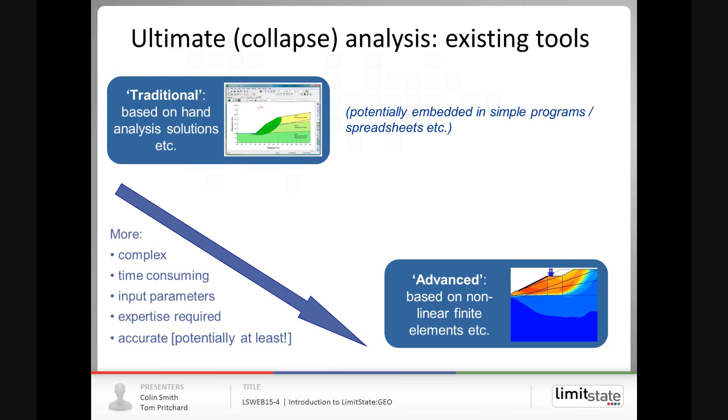Now, as I've said, Limit State focuses on tools for limit state or ultimate limit state analysis. To put this into context with other currently available software, on the one hand, on the top left of this diagram, we have generally easy to use software and spreadsheets that are based generally on conventional hand calculation type methods. And these can deal with specific problem types. On the other hand, down on the bottom right, we have more complex finite element software. These can model any problem geometry and complex soil behavior, but often can be quite difficult to use. Between these two, there's a gap, and this is where we feel limit, or computational limit analysis sits, or rigid plastic analysis.

This type of method provides the ease of use of traditional software. You only need a few parameters such as cohesion, friction, and unit weight, but it gives you the flexibility of dealing with any geometry that you get from finite elements. This is primarily what Limit State focuses on. Now, this sort of approach can deal with geotechnical problems. It can also deal with other engineering problems such as masonry arch bridge analysis and concrete slab analysis. All of these can be cast in a rigid plastic form and use computational limit analysis.

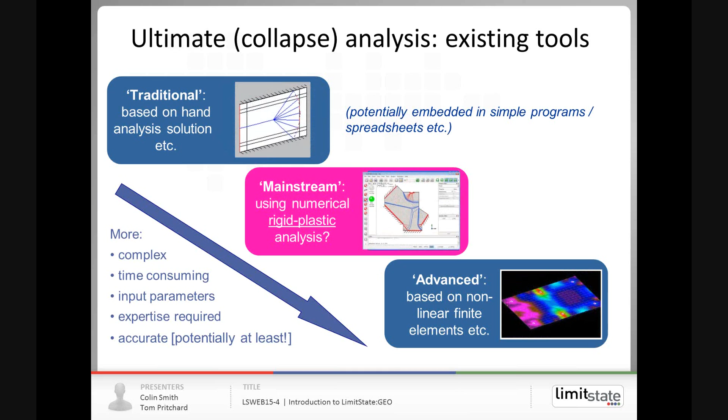In terms of the geotechnical analysis, this ability to find collapse loads can be applied to a whole range of problems. We can deal with any geometry, so as you can see from the slide here, we can model footings, retaining walls, slopes, combined problems, soil structure interaction problems, where we can find the collapse load and the collapse mechanism for any of these problem types.

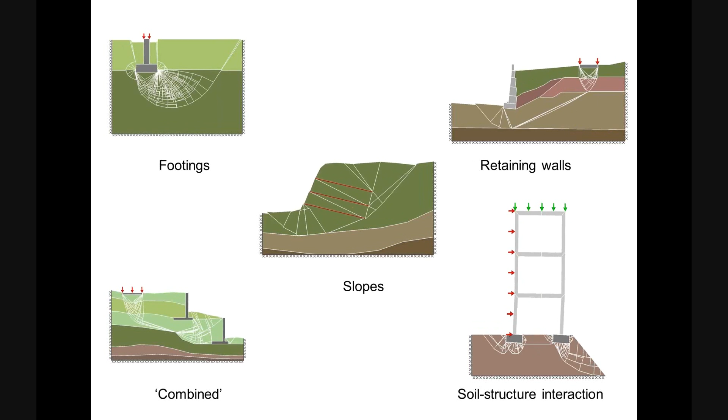And similar flexibility can be found in other LimitState products. At present, we have LimitState RING, LimitState GEO, which is the subject of today's webinar, and LimitState SLAB for concrete slab analysis.

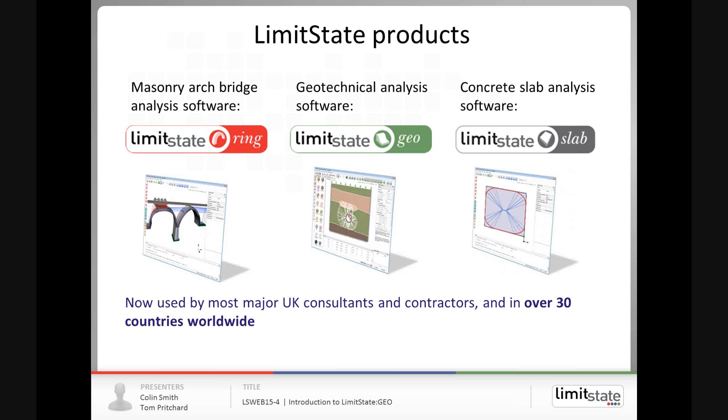If you've not used our software before, you may not be aware of how easy to use it is, and we feel this is one of the attractions, as well as its powerful ability to generate collapse modes for any geometry. And this has led to it being adopted by a wide range of companies across the world.

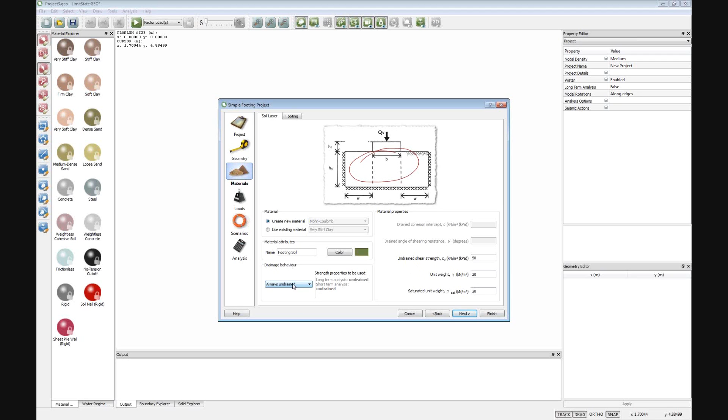This then brings up the wizard, and you can put in a number of properties. So here we can put a description of the problem, which we'll omit. Here we can generate the geometry, so the width of the footing, size of the soil body, and so on. We'll stick with the defaults here. Then we can define the material properties. Again, we'll stick with the defaults, but at the moment we're specifying an undrained shear strength of 50, a unit weight of 20, and we're declaring this material always behaves undrained.

We can then set the material properties for the footing. We're just going to make it a rigid, weightless material, and we can also specify the interface properties between the soil and the footing. So we're setting these values here, which basically say that on the interface we have half the friction and half the cohesion of the adjacent soil body.

We then specify a load. Default here is 1. I'm going to set that to 100. So it's 100 kilonewton per meter load. All the analysis is in plane strain, so this is per unit length. And we can then set up partial factors, which I'll skip for a moment. We'll come back to that later.

And some further information about the analysis type. We're going to use what's called factor loads, which is finding the margin of safety on the load applied to this footing, and nodal density, which governs the accuracy of the solution. We'll come back to that later again.

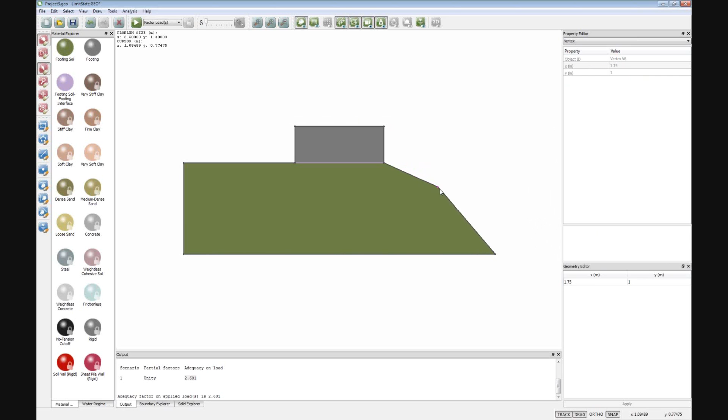So then if I click solve, the software will now find a new collapse mechanism, and it's very different from the previous one. Clearly it's going to slide down towards the slope, and we now have an adequacy factor of 1.882, which means that that foundation can only take a load 1.8 times bigger than we specified, rather than the 2.6 that we had before.

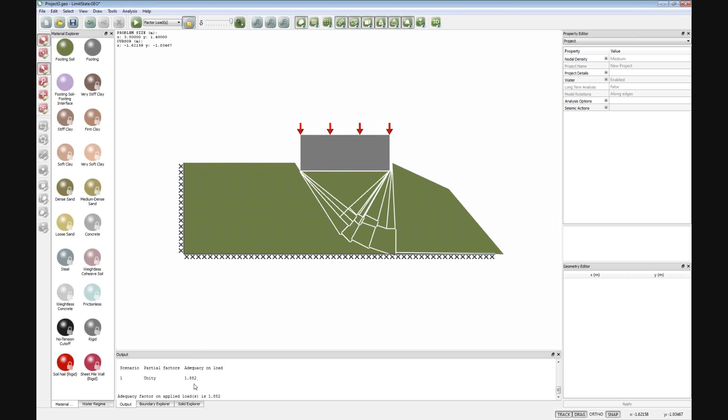I'll just undo that. So we have an undo button here, so I can just undo and revert that back there.

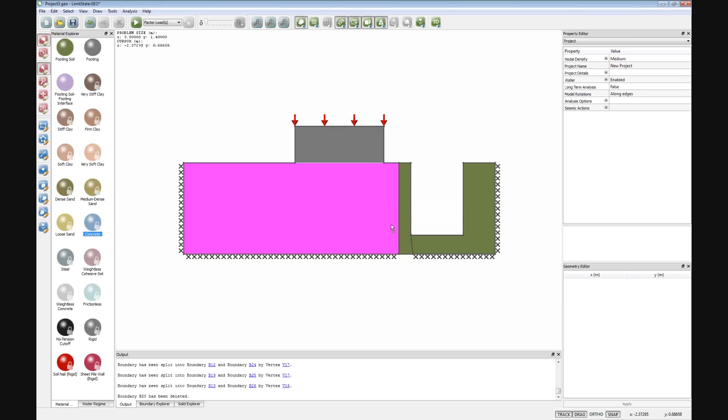But it's very easy to do what-if type calculations in this. So suppose you've got a trench there, and hypothetically we think, could we construct a wall next to it? It's not a very elegant wall there, so I'll make that out of concrete. So I have material properties over here on the left. These are standard things, so this concrete just basically has a very high shear strength and a unit weight.

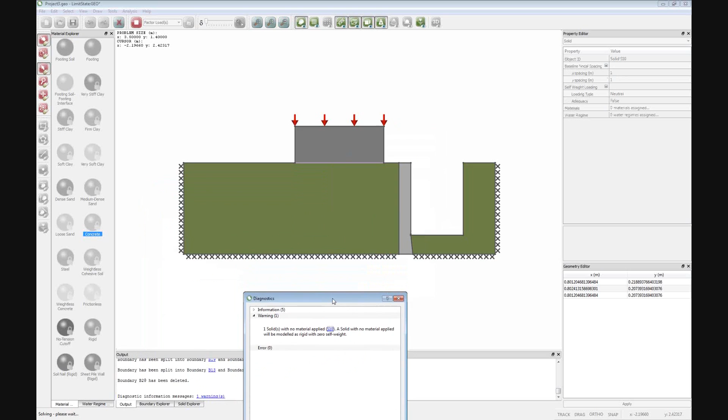I can drag and drop that, put that in place there, so I've now got a wall there, and we can see whether that, let me just see what's happened here. Right, I think I've just set the geometry slightly too far down, so we'll try that again. Let's put a smaller wall in place. Put the concrete there, and then run the analysis.

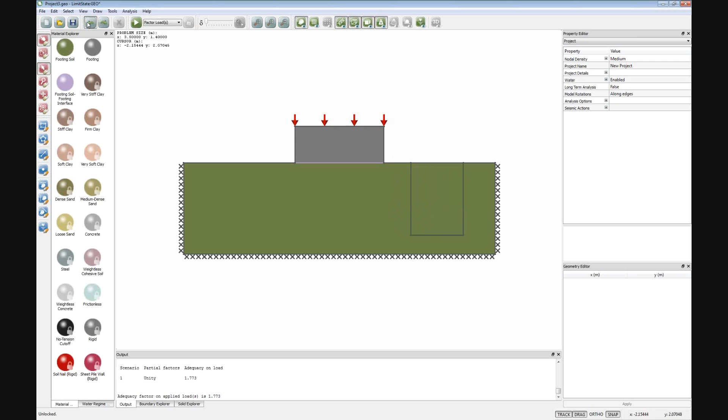And the presence of that rather strange looking wall has improved the adequacy factor on that load. So it's very easy to do what-if type calculations, modify the geometry slightly, change material properties, and get a feel for what's controlling the problem, what are the key issues in the problem. Now I'm going to revert back to the original problem, so just keep clicking undo until we get back to that.

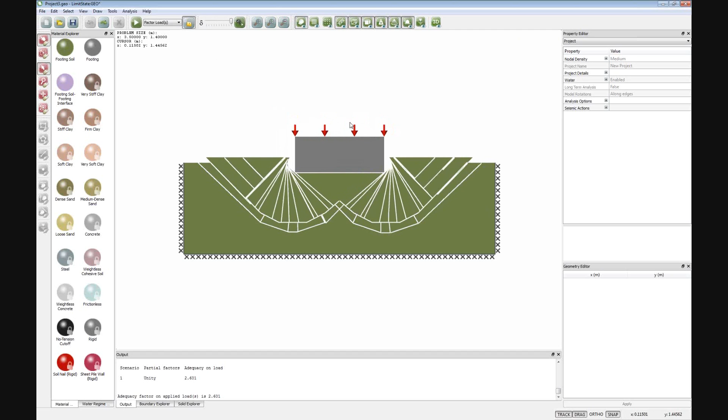And just to go a bit further into the meaning of this adequacy factor, we've got an answer of 2.6 here, which means, as I said before, we have to multiply this load by 2.6 to cause collapse. So to clarify that, suppose I change that load, instead of it being 100, I change it to 200, so that's a defined load there. What we should find is now we've got a margin of safety of just 1.3, and that indeed is what the software produces, exactly the same collapse mechanism, and now it's telling us we would need to multiply that load by 1.3 to cause collapse.

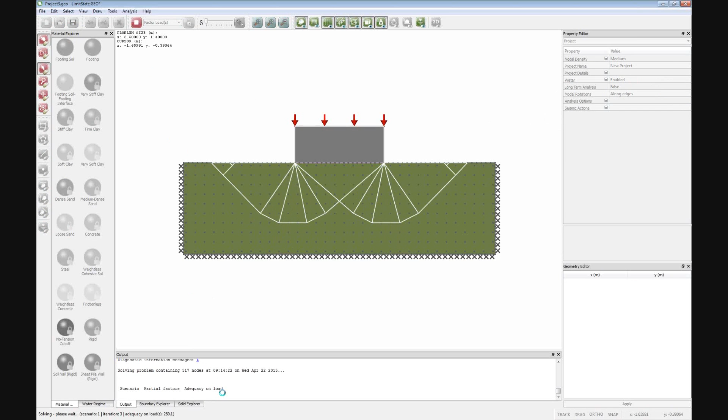The alternative way of using this setup is, suppose we just wanted to know what the bearing capacity was, if we just set that load to a unit value, then whatever answer we get will be the bearing capacity in terms of load. So here it's now giving us a number of 260. So basically we have to multiply that unit load by 260 to give us collapse. So we can use the software in two different ways, either put in the design loads, or we can simply put a unit load in and get the software to tell us what the bearing capacity is.

Now, before I go further with the software, you'll have seen that when we run this analysis, we get various points appearing on the screen and these slip lines gradually evolving to a certain state. So I think at this stage it's useful to quickly go back to the slides and just explain how the software works, what it's actually doing.

So the key underpinning the software is a relatively new numerical technique called discontinuity layout optimization, or DLO. That was an outcome of a 5-year research program at the University of Sheffield, and the core method was published in the Proceedings of the Royal Society in 2007. And it basically works like this.

We have a domain here, it's a very simple domain. We have a block of soil, with a load at the top, fixed boundaries to the left and to the base. Instead of discretizing it into elements, as in the finite element method, we actually populate it with a series of nodes. So here we've got a 4x3 grid of nodes, that's 12 nodes. And we connect every node to every other node with a potential slip line.

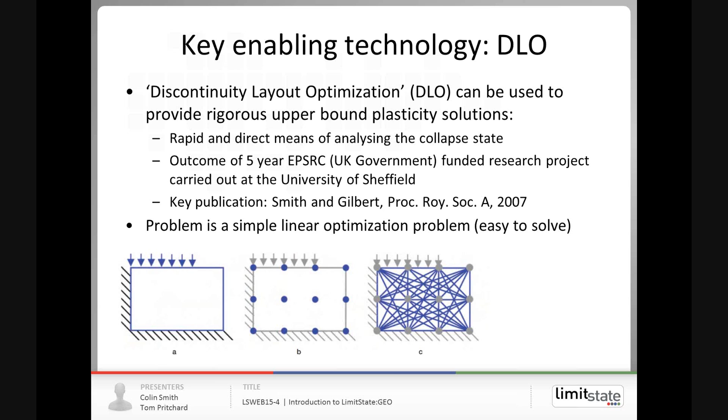So in this case, I think we have 12 times 11 divided by 2, so that's 66 potential slip lines in this problem. And then we can cast that as a linear optimization problem, feed that into a very powerful linear optimizer, and what that will do is select out of those 66 slip lines the key slip lines that give you collapse, essentially that give you the mechanism that dissipates the least energy.

And in this case, out of those 66, we can pick out the 6 or 7 slip lines that give you the key mechanism. This is the critical one in that case.

Once we solve the problem, the software connects all these slip lines together to identify the solid blocks in between the lines, and then animates it, which helps interpretation of the problem afterwards.

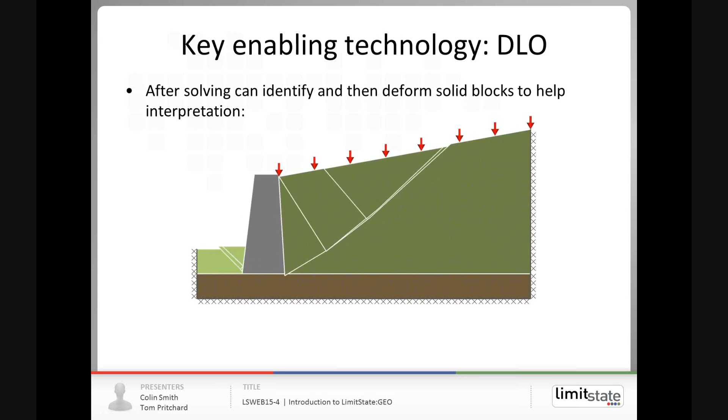What you find often with collapse mechanisms is you get these fan zones where lots of slip lines meet at a point - that's a mathematical singularity where you have many stress states at one geometrical point. Finite elements find this quite difficult to deal with; you have to design the mesh carefully, use mesh refinement. With this software approach, the singularity is identified without difficulty - no extra programming is done, it's just inherent in the method.

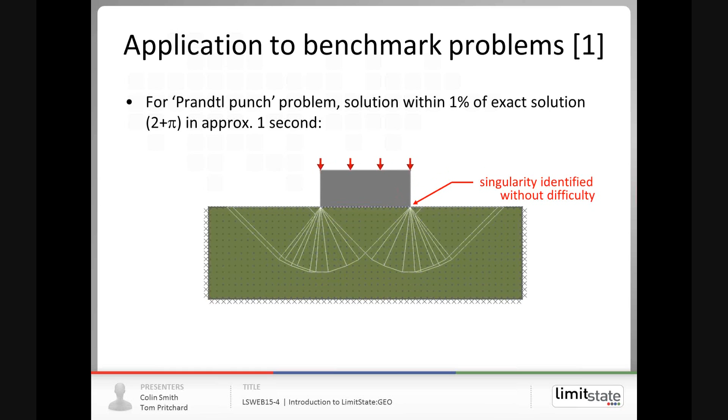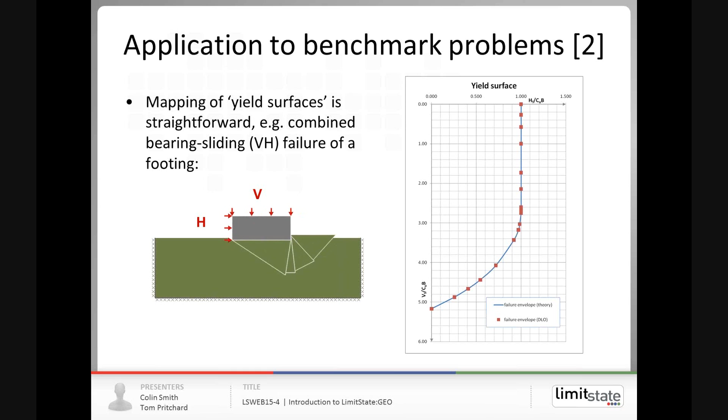Now, being a relatively numerical method, you obviously want to be sure it actually does what it says on the tin and gives accurate answers. So as I said earlier, we have a lot of tests that run automatically every time the software is modified. Many of these are verifications against closed-form solutions available in the literature.

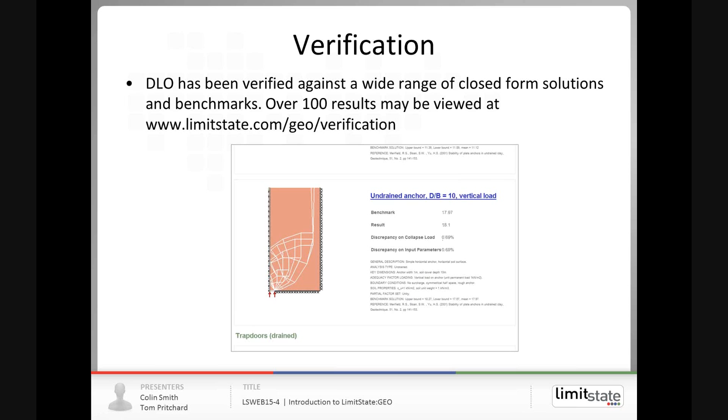Okay, so what I'm going to do now, having gone through that introduction or explanation of how the software works, is just have a look at this problem again, but this time we're going to use sand.

So this soil at the moment, if I click on here, has been modelled - its properties appear here. It's basically been modelled as a soil of strength 50, unit weight 20, and it always behaves in an undrained manner.

Well, we have a lot of materials defined on the left here. You can define your own materials, which are basically these materials defined by the wizard, but you can define them yourself. There's some built-in ones just for quick what-if type calculations. We've got one here called loose sand - has a friction angle of 30, unit weight of 14 dry, saturated weight of 19. I can simply drag and drop that onto there, replace the material, and now the soil there is a sand.

This interface here, I'm going to change to a frictionless interface, drop that on. So now we have a smooth footing sitting on sand. If I click solve, you'll see we've got a very different collapse mechanism, which is what you'd expect for a foundation on sand.

What you'll also see here is that when I've animated it, some of these blocks appear to come apart. Now this is perfectly correct - this software uses rigorous plasticity analysis, and when we model frictional materials, that friction is modeled as dilation. So in the animation you'll see that dilation happening - as the material slides, it will actually dilate and come apart.

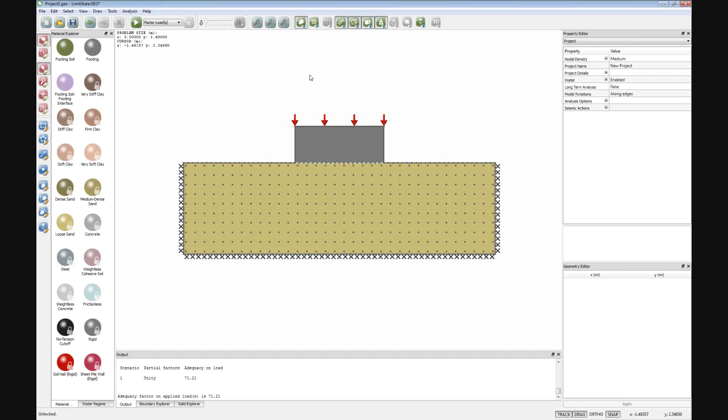I can change that nodal density using this setting up here. So if I click anywhere on the blank area on this screen on the right, we get the property editor for the project. That gives us some high-level definitions, one of which is the number of nodes to be used.

And I can change to a fine nodal density, which gives me 1,000 nodes. If I preview the nodes, you'll see that we've got a lot more nodes in there. And if I solve, you'll see that I get a more refined collapse mechanism, and I get a result here. This is a multiplier in the load, which I think is set to 1 of 65. Before we had 71, so the accuracy has gone up.

We've come down a lot, and then if I can also set this to say very fine, we now got 2,000, and again we'll get another answer which will be slightly more accurate. As you can see, these solutions take a little bit longer. The more nodes you have, clearly it's a bigger problem for the computer to solve, therefore it's going to take a little longer. So we've come down from 65 to 62 for that solution.

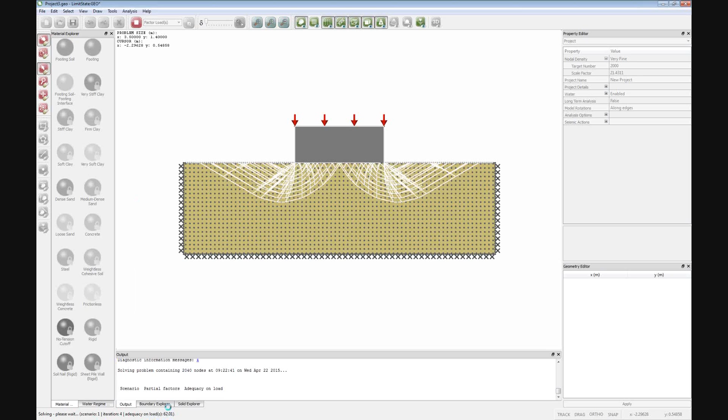So what you find is for frictional problems, you generally need to use quite a high number of nodes. For undrained problems, you can usually use relatively few nodes. Medium density usually works very well, but it just requires a little bit of trial and error to get a feel for the number of nodes that are required.

Now, we've got here standard settings, of course, medium, fine, very fine, but you can set a custom mode, so you can actually type in as many as you want there. So if I wanted 1,240, I can have 1,240 nodes, whatever I like.

So I'm going to revert that back to medium, just to give us something so we're solving pretty quick for this demonstration. What I'm going to do is click on this boundary here, and so anything I click on, its properties appear here. It tells me I've got one material there, which is a frictionless material.

If I click on this entry here, I get this change button, and what I'm going to do is remove that frictionless material. And now, effectively, we've got a rough foundation, a fully rough interface between the soil. See what that does.

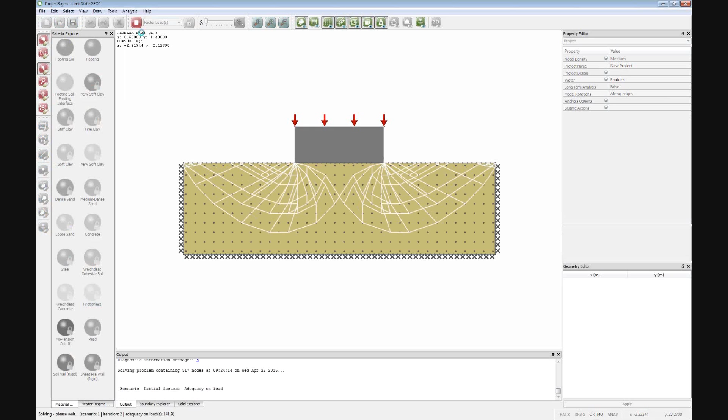So that now gives us a very different collapse mechanism, and what you can immediately see is that the mechanism is hitting the edges of the boundary or domain that we've presented to the software. These are probably not real boundaries, they're artificial, just to give us a domain that the computer can solve, but in effect we've probably got a semi-infinite domain. So if we see something like that, we need to make sure the mechanism does not intersect these kind of artificial boundaries. So we need to move these boundaries out.

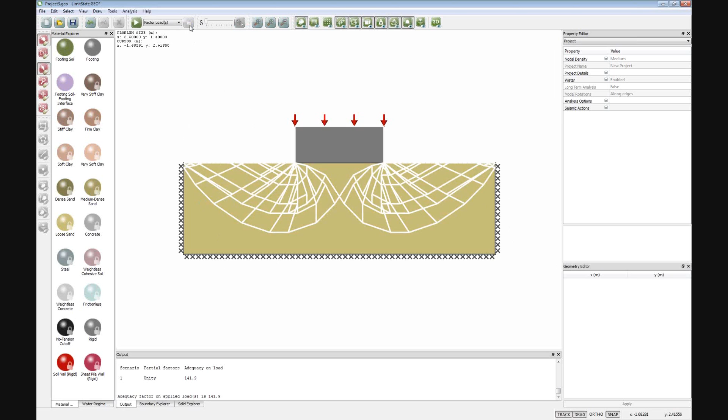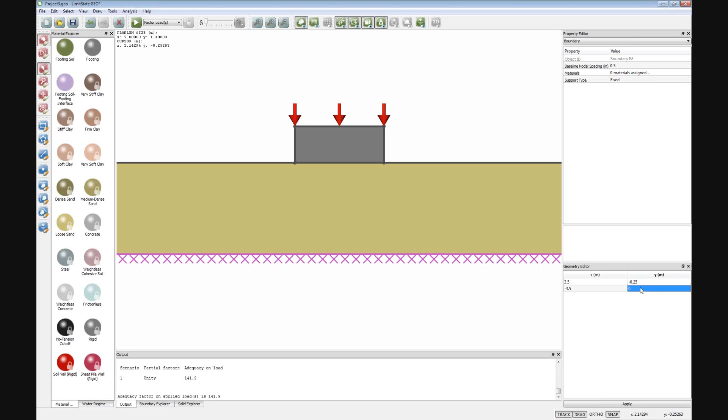So I just have to know in advance that this will be sufficient to give us a solution that will be contained in the boundaries. So now we get the full mechanism appearing, and we haven't got interference from the boundaries, so that's not going to affect the solution. We get the answer for a rough footing, and the load capacity has gone up quite significantly compared to the smooth footing, which is what we expect.

So that's a very brief overview, just exploring the software using the simple case of a simple footing. We've looked at undrained soils, we've looked at drained soils, we looked at the boundary, we looked at how it solves a problem with nodes and slip lines.

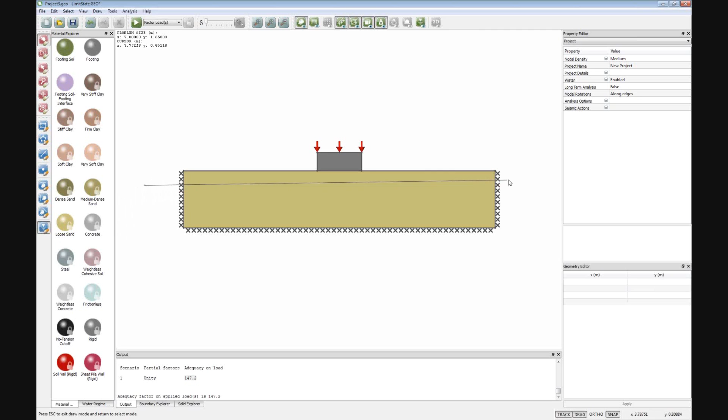Last thing, very quickly, is we can put water into the problem. There are various ways of doing that. I haven't got time to cover all of those in this introduction, but the simplest way is to click on this button here - this is draw the water table. I could draw a water table across the problem like this. Now we have a water table, and then we solve the problem again, and we'll now get a solution.

Which incorporates a water table and modifies the solution.

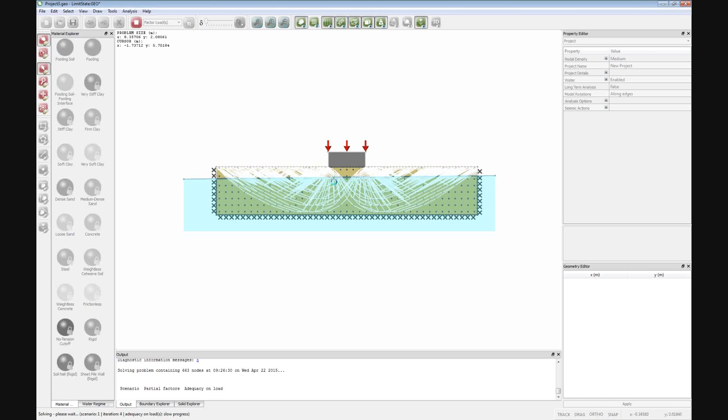Apologies for that. Occasionally we get what's called a slow progress. We're using a third-party linear programming solver, and occasionally it throws up a slow progress, which means it's got kind of stuck finding the linear programming solution. Often if you resolve, it just gives you the answer straight away.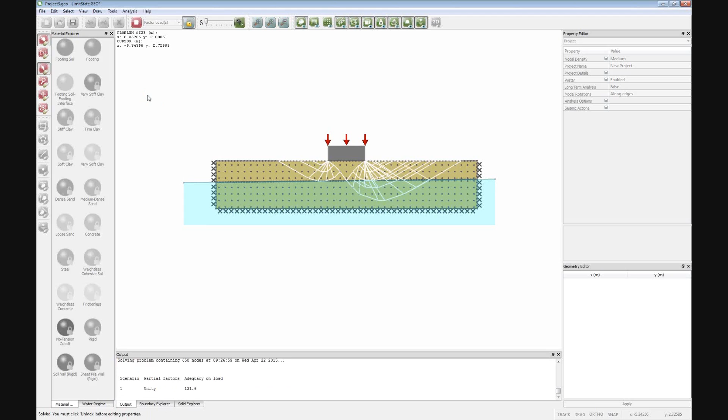But in this case, you can see I've got a solution where the water table is affecting the lower part of the mechanism here. Because the water table's inclined slightly, the mechanism has skewed itself to the right to make use of that weaker soil where the water is, and the adequacy factor has gone down from the previous case, which was about 147. So that water has reduced the bearing capacity as we would expect.

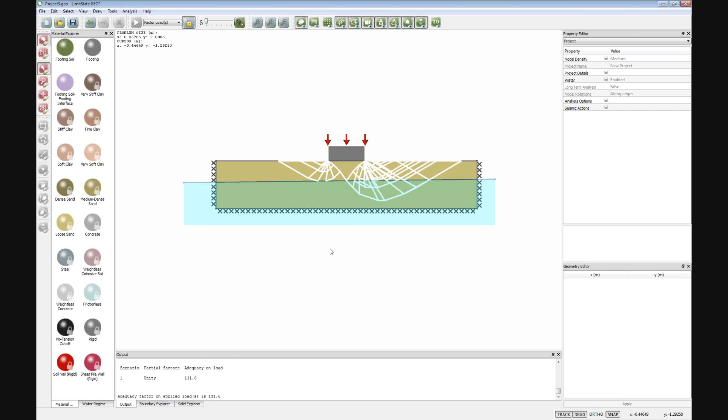Now, we're not restricted to solving bearing capacity problems. As you've seen earlier, we can solve any geometry. I'm just going to move to a slope stability problem. Again, we have a wizard that generates the geometry. I'm going to stick with the defaults, so we get a very steep slope here.

This is an undrained problem. What I want to emphasize here is this setting: we have a choice of factor load or factor strength. Factor load basically asks the software how much bigger an applied load has to be to cause collapse - that's very relevant for, say, bearing capacity problems. Factor strength is more relevant for slopes. So what we want to know is how much do we have to reduce the strength of the soil by to get to collapse. So I click solve here.

The software will quickly run through a range of mechanisms and finds the critical mechanism. It says basically we have to reduce the strength of the soil in the problem by a factor of 2.47, and we'll get this failure mode in the slope.

Just to clarify that, if I click on this material, this body here, I can see the soil - we're using soil A, with an undrained strength of 50. If I change that to 25, so I reduce the strength and resolve, then we should find that my factor of strength should halve as well. And so I need to reduce it by a factor now of 1.23 to cause collapse, which is what we'd expect - that's half the value we had before.

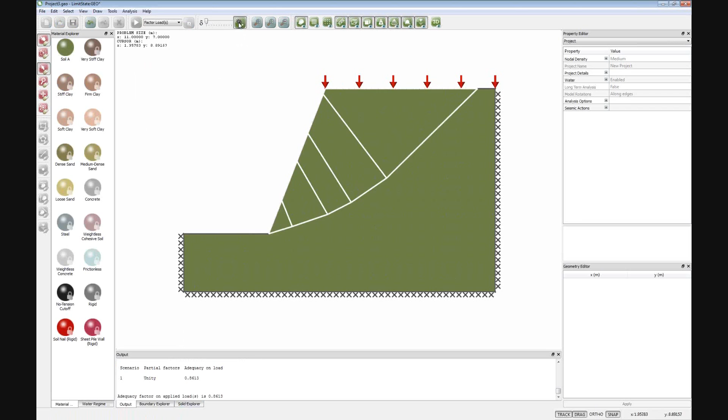I've also set that true on the self-weight of the soil. I'm going to set that to false, so we're simply asking the software what I have to multiply that surface load by to cause collapse. And I get an answer here of 0.86 - it's different from the previous case. So this load is too big; it would need to be 86 roughly to cause collapse in this particular case.

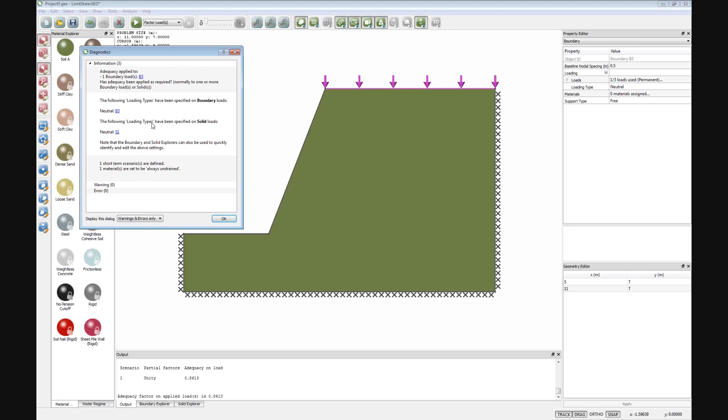We have a feature called Diagnostics, which gives you background information to the problem. It tells us I've got this adequacy factor applied to one boundary load, and I'm hyperlinked to the load I want to see. It tells me what sort of loading types have been applied - this is down to partial factoring, which we'll talk about later - and it's told me materials are set to undrained and so on. This is a fairly simple problem, but it's a very useful feature which gives you a quick overview of the whole problem, once you've set it up, to check it is as you planned.

What we can also do in a problem like this is, if I run that, you'll see the mechanism we're getting goes down to the toe.

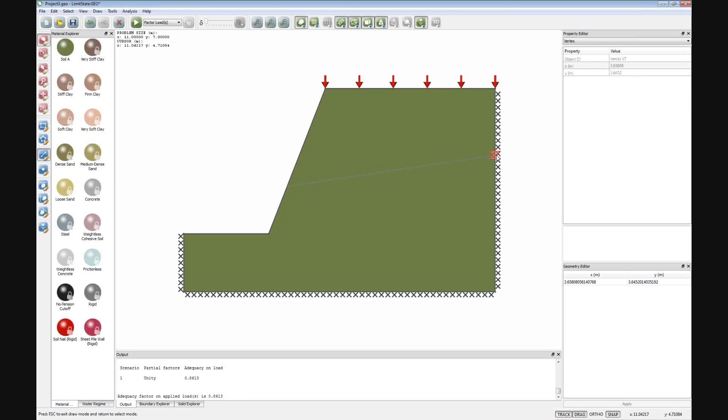If, for example, in a slope we might have a pre-existing slip surface, I'll do this very simply using this drawing tool, which allows me to draw boundaries. This blue button on the left lets me draw a line. That allows me to put a line in there, and I can assign, for example, a very soft clay to that boundary - effectively I've got a very weak interface here, weaker than the surrounding soil.

If I click Solve, the software finds a collapse mechanism which utilizes that thin layer. It'll give me a lower adequacy factor - sorry, pressed the wrong button there. We can add in things like pre-existing slip surfaces, or thin layers of different properties.

So these boundaries can be inside a soil body, or we can use these on the interface between, say, a foundation and a soil, as we saw before.

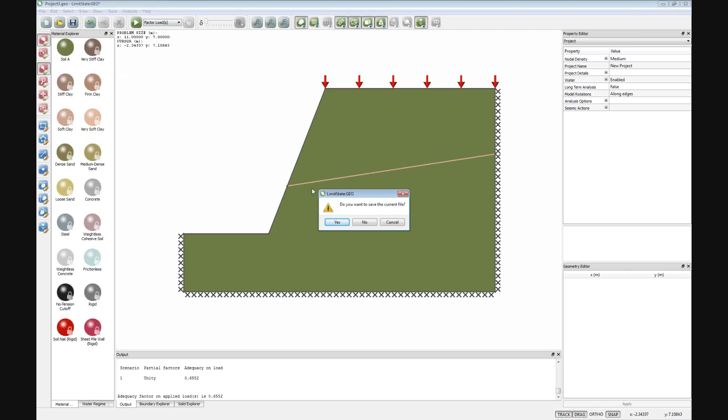Okay, that's a slope. We'll have a quick look at another problem type - we'll have a look at a gravity wall.

Again, I'm just going to accept all the defaults. So basically we've got a wall here with soil behind it - undrained, shear strength of 50. The underlying soil here is the same strength.

Just to show you, if I go to preview nodes, what the software's done here is put more nodes at the base than behind the wall. So if we're expecting a more complex mechanism below the foundation, we might put more nodes there just to capture that accuracy. It's possible to vary the nodal densities in each body, tuned by these numbers here.

You can see if I select here, we've got these spaced at 1/2. If I click here, they're spaced at 1, or a relative spacing of 1.

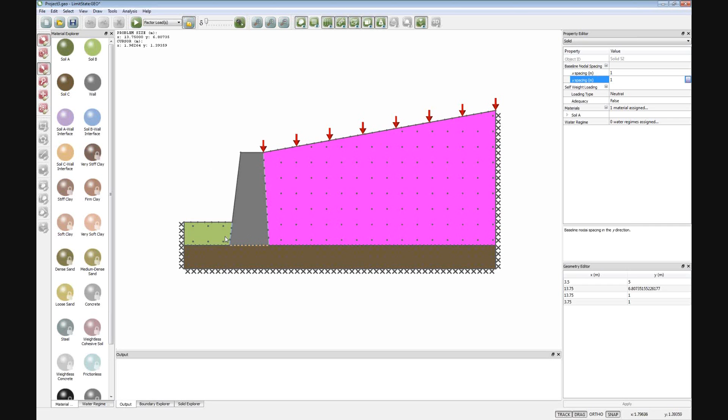So if I click Solve - click Solve - in this particular case, the mechanism actually ignores the underlying soil and just slides on the surface.

But if the underlying soil here - supposing I reduce its strength to 30 - we should get a failure including the underlying area.

In this particular case, it's actually turned out to be a relatively simple mechanism underneath the wall, so maybe we didn't need all those nodes, but in other scenarios you can get more complicated mechanisms, particularly where the wall is undergoing more of a bearing capacity failure.

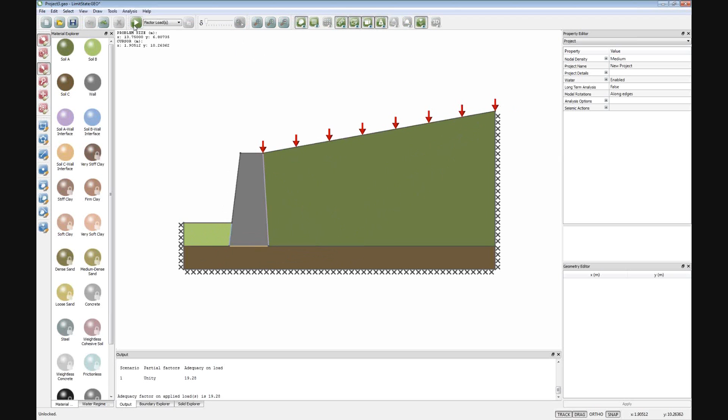I've just reverted back to the original strength, so if I click Solve here...

What I want to show is that when we get the solution, if we want to report about that, we can click Report here, and that produces a document you can edit with all the background to the project, all the details you've entered, and an image of the collapse mechanism.

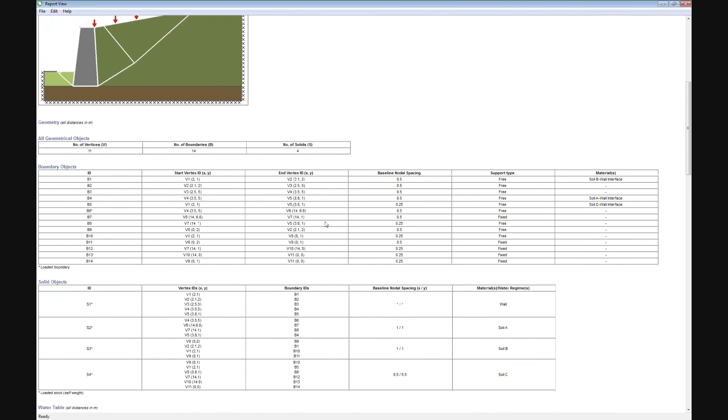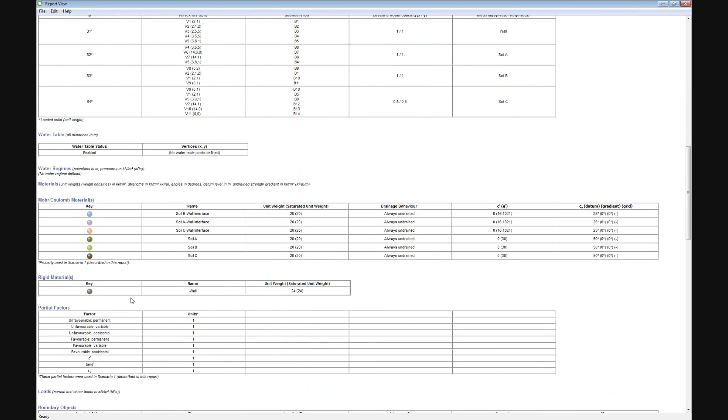If you want, it can give you all the coordinates of the boundaries and the geometry, details about the water table, the materials used in the problem, and the partial factors used - we'll come to that later.

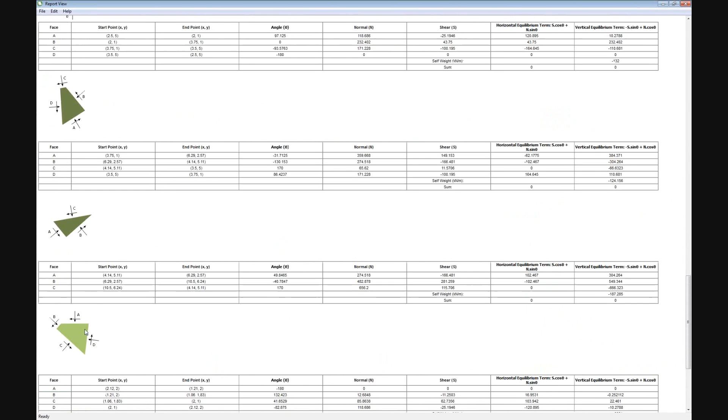And again, if you wish, it can also give you free body diagrams for each of the elements of the block, so that for a very simple mechanism you can check that by hand if you wished, just to see what's going on. That can be useful occasionally if you get a mechanism you're not quite sure why it's being produced by the software - getting the numbers and having a look at those can usually make sense of those things.

You can also click on the blocks and get distributions of forces, or the forces acting on each block from the diagram, and again you can check that equilibrium in that way.

We'll have a quick look at another problem - so let's look at a stem wall.

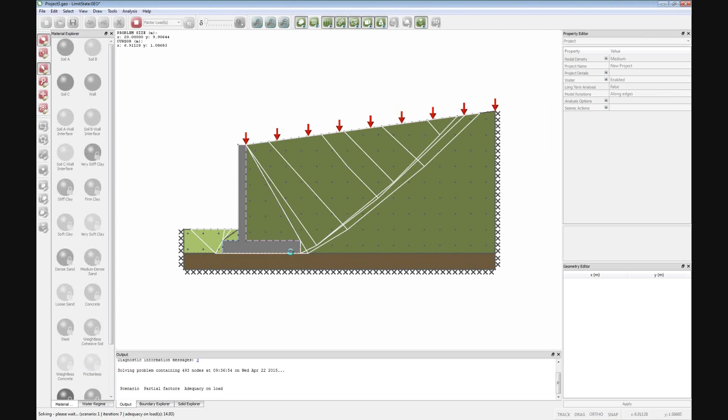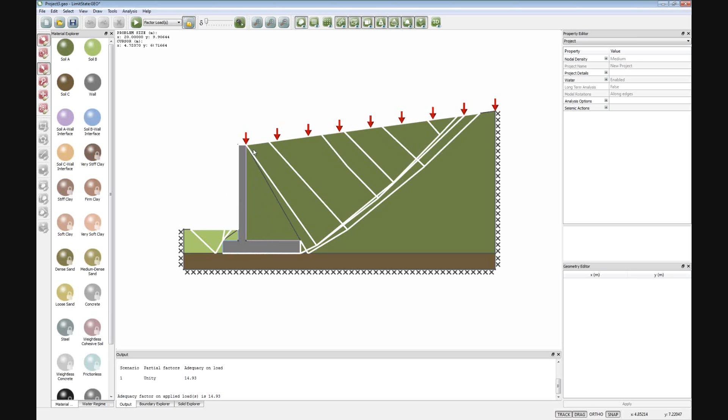So this is a problem where the weight of the soil itself is providing some of the stability of the wall. And in this particular case, it's quite convenient to actually separate out these triangular areas, these corners within the soil body, because generally these don't deform, so it gives the software a bit more flexibility to treat the soil and the wall as a single mass.

Now what I wanted to do here was just give an example of if you wanted to import a geometry. We can use DXF. What I'm going to do here is actually export this geometry and then regenerate it. So if I have an export here, I can export this geometry as a DXF file. I'll call that stem wall.

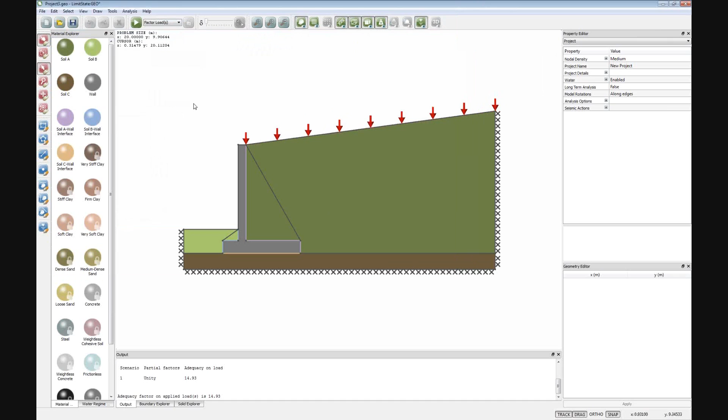And then if I want to start a new project, start an empty project, finish that, turn off the grid. But I can import a geometry, this stem wall, as a DXF file. So we generate a DXF file, but we can use any DXF file from a CAD program, whatever you like, and we get the bare bones geometry there. And so we can rapidly import that.

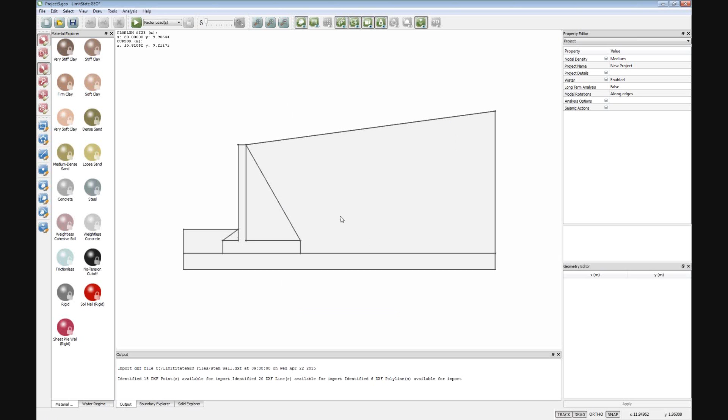Then we need to populate that with some soils. If I use the built-in soils here, I'll maybe put some backfill, firm clay, just for simplicity. Maybe some sand at the base, concrete on the wall. So now I've got all the soil types there.

I also need to set boundary conditions. I can do these collectively if I click on several at once. I can set all the properties there in one go, fixed. I also need to do the back at this stage. And perhaps I'll apply a load to the surface of a unit load and put adequacy true. So that's generated that problem very quickly.

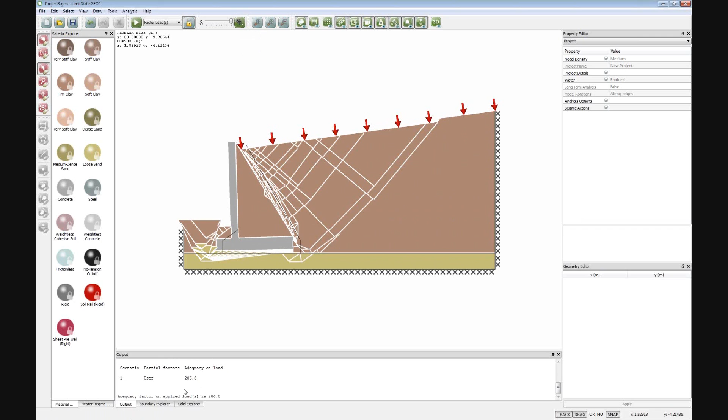If I click solve, hopefully we get a failing mechanism. So the wall is sliding, tilting slightly, and it's very strong. We need to multiply that surface load by 206 to get collapse.

And again, if we wanted to look at these diagnostics, it tells us a bit more information in this particular problem. We've got adequacy on one boundary. It also gives us advice such as the following interfaces, which are basically around the stem wall, separate a strong material from a weak material. And it's just telling us that maybe we wanted to specify the interface properties. At the moment, the software is modeling that as a fully rough interface. Maybe we wanted something slightly different.

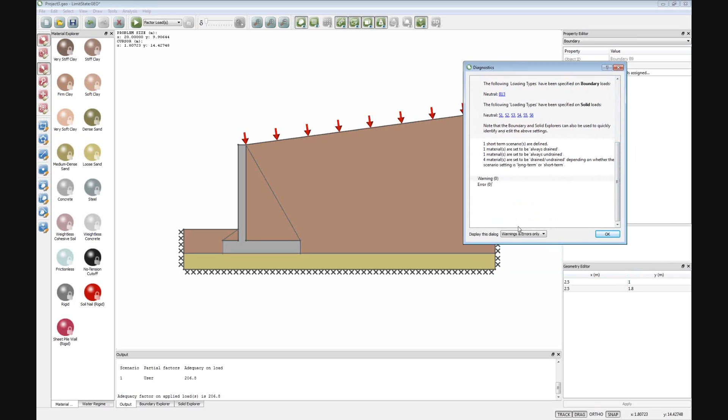And again, it gives us some information about the materials we've set. These diagnostics also come up if we forget to put a load on. So, for example, if I just put a fixed load here and I haven't applied adequacy to anything, then the software will tell me I need to set an adequacy factor. I need to ask the software how much bigger do I have to multiply something in this problem by to cause collapse.

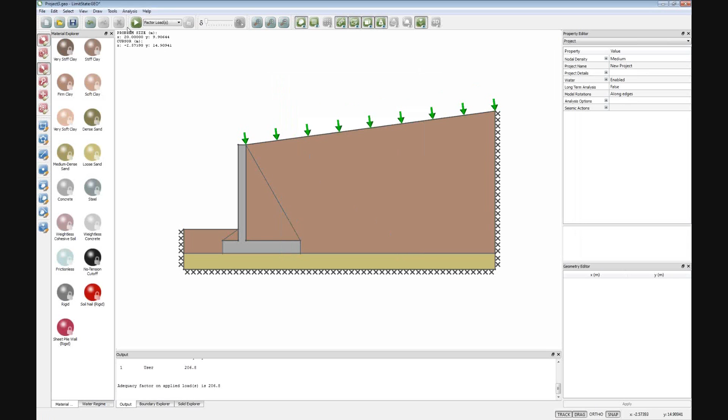Okay, so that's a stem wall. We'll have a look at one last problem type, which is a sheet pile wall. So here we have a sheet wall, and again, for the moment we've got clay at the back. This is set to be always undrained, so it's got an undrained strength of 20, and this material is also always undrained, strength of 25.

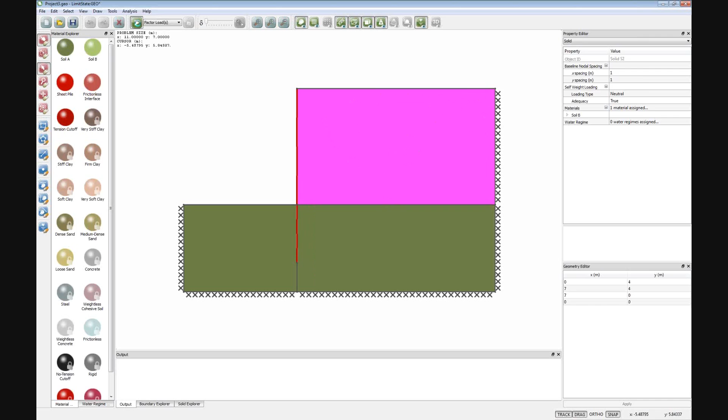I'll just click solve for the moment, and what we've done here is we've actually put an adequacy factor true on the weight of this soil. So in this particular problem, we're just saying how much heavier does this soil here have to be to cause collapse. So we can cast the problem in many different ways depending on what we're interested in. So the software finds a collapse mechanism.

If I animate it, what you see is actually we get a tension crack opening up between the wall and the soil, and most of the pressure is down here. And for a retaining wall, the way it's modelled, we can generate bending moment diagrams, and also get axial force and shear force in the wall as we go.

So just to explain in a bit more detail, this element here is actually modelled as what we call an engineered element. I haven't got time to describe that in detail, but essentially for a sheet pile, it allows us to specify a bending moment within it. Some other numbers are generally set to infinity for a sheet pile wall. This is the key number, and also we have boundary materials on the left and on the right. So you can see that we've actually modelled this with a frictionless interface and the tension cutoff.

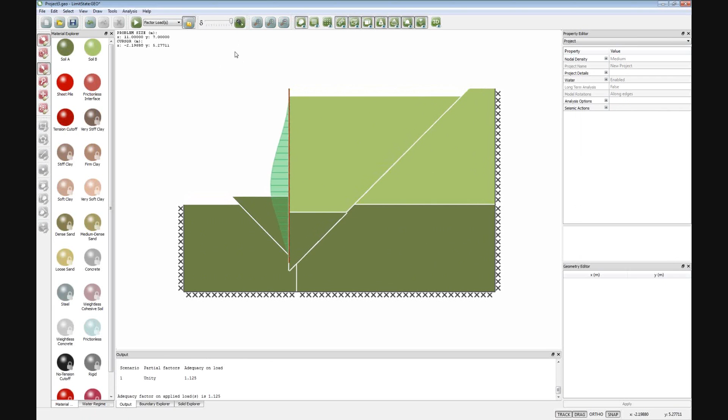So that tension cutoff material is the key material which allows us to model that tension crack. I can actually remove that from both sides of this wall and rerun the model, and you'll see that because it isn't allowed to form a tension crack, we get a different collapse mechanism - a very simple sliding across the wall and a very different bending moment distribution.

So we've got significant flexibility in modeling interfaces. I'm just going to revert those two changes, so I think we're back to those two materials. And I'll get rid of that tension crack.

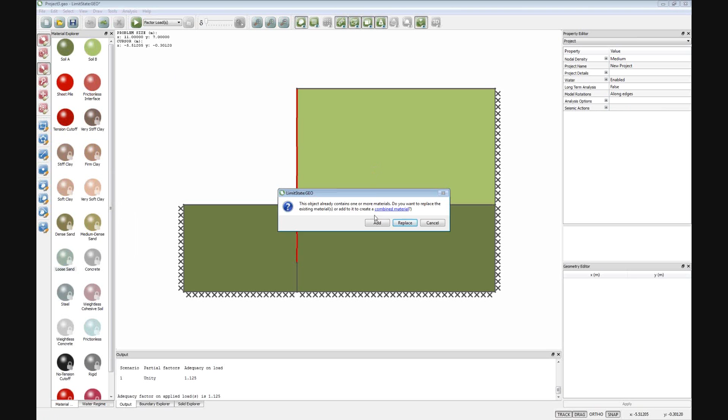In other words, suppose we wanted to retain sand, so I'm going to replace that with sand, and we'll look at the problem. We get a different mechanism here. Clearly you're not going to get a tension crack between a dry sand and a retaining wall, and now the wall is going to rotate.

And again, this green graph here basically plots the bending moments. We can change that by right-clicking. We can plot different values, but we're most interested in bending moment in this particular case. We can see the biggest bending moment at the moment, if we hover here, is roughly 48.5.

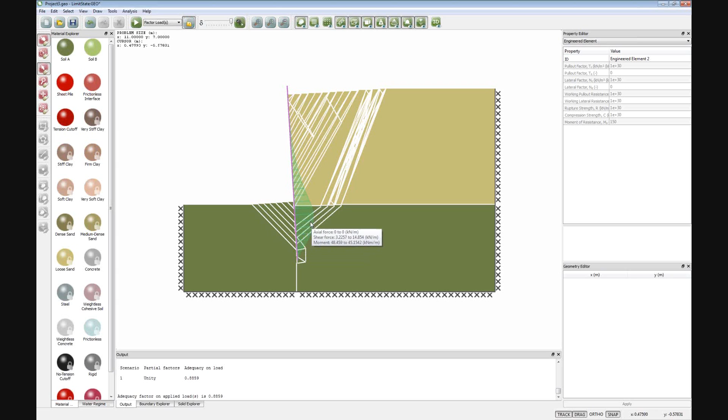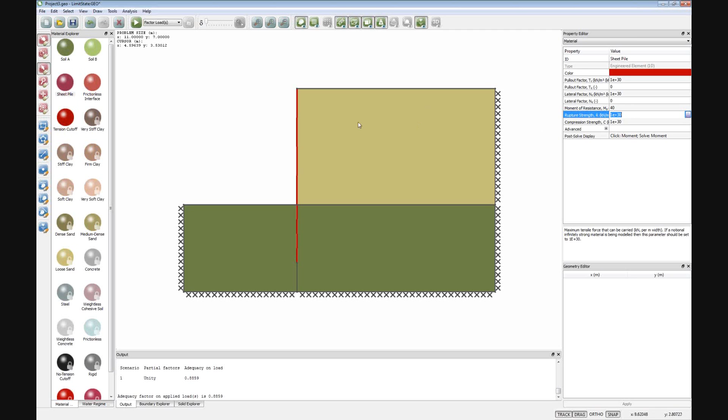Now you can use the software to actually check to see whether you're going to exceed bending moment. There, the software is telling us that the maximum bending moment gets up to about 45, but it's better to actually set the actual bending moment to a value and allow the software to find the collapse mechanism that involves that. So if I set that bending moment to 40, what we should find is that a plastic hinge forms, and yeah, it does there, and we get a similar bending moment distribution, but a very different mechanism. So basically the wall hinges at this point, and we've limited to this bending moment of 40.

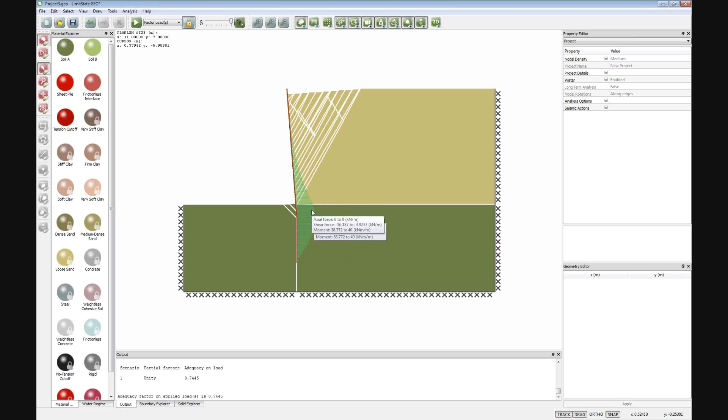So it's better to do that - to actually set the bending moment in the software to the value you want to use, and get the software to find the critical collapse mechanism that involves that, rather than interpreting this curve if you're not getting yielding in the wall.

Okay, so that's very briefly looking at modeling tension cracks and a retaining wall, and just to finish off, we're going to have a look at how the software deals with partial factors. So we're going to go back to the original simple footing problem, and I'm going to set a load of 100 here.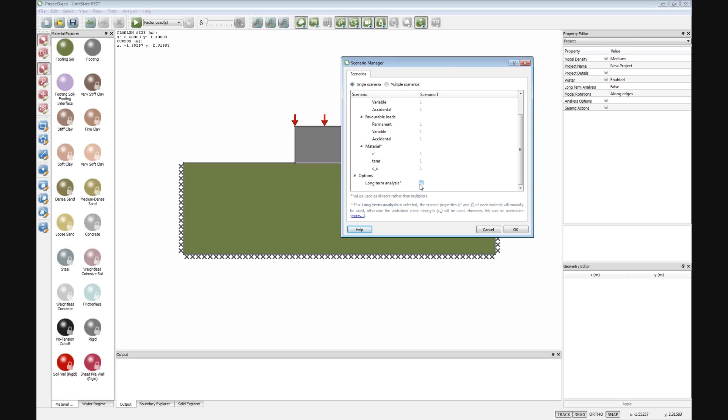So basically, that permanent unfavorable load will be multiplied by 1, favorable loads multiplied by 1, and the material properties are multiplied by 1. We also have this setting for long and short-term analysis. This is a convenient way of switching from drained to undrained properties in the software. And what you'd have seen is that any material that I've defined, we have both drained properties and undrained, and the ones the software uses are defined by this setting here.

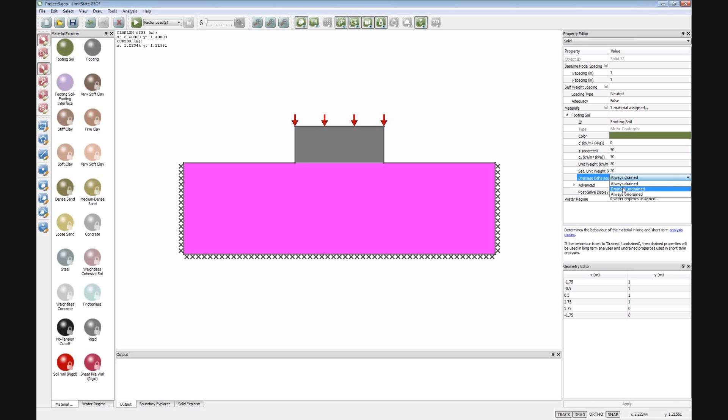So if we say always undrained, it will always use that CU of 50. If I say always drained, it will always use C dash of 0, phi dash of 30. And if I say drained or undrained, then the choice of which one it uses is defined by this flag here, long-term analysis, false or true, which is also duplicated in the scenario manager. So clicking true here means it will always use the drained parameters where it has the choice. Turning it off means it will always use undrained.

What I'm going to do here is just set up some multiple scenarios. So what we might want to do is check this problem with Eurocode 7 Design Approach 1 Combination 1 and Combination 2.

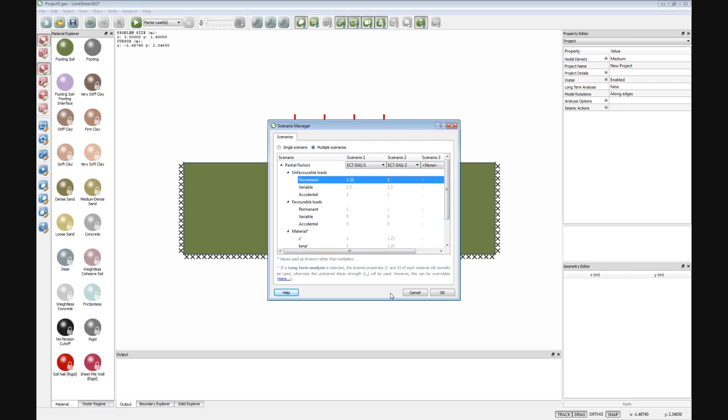And you can see that in this case, combination 1, we're going to multiply that permanent unfavorable load by 1.35, but we're not going to factor the material properties. These are all factored by 1. And in scenario 2, the material properties are going to be factored, but the permanent load is not going to be factored. And the software will basically solve the problem twice with those different sets of factors.

If I click Solve, you can see down here we've got some tabs, scenario 1, scenario 2. Both cases, the mechanism turns out to be the same. It's only really for frictional materials when we factor the strengths that we would expect to see significant changes in the mechanism. And you can see that we've got an adequacy factor here of 1.927. So that's effectively the over-design factor over and above the Eurocode factors on this problem. So having applied the Eurocode factors, we've got an extra margin of 1.9 over and above that on that load.

And for Design Approach 1 Combination 2, we've got a slightly lower factor, which is what we expect, because we're factoring the strength of the soil down by 1.4 in this case. We're factoring the load up by 1.35 in this case, and for an undrained problem, there's a linear relationship between the strength and the load, so this is the more critical case, as you'd expect.

So essentially, when you're using partial factors, for example with the Eurocode, as long as the adequacy factor is bigger than 1, you've satisfied the criteria. If it's less than 1, then you haven't satisfied the criteria and you're going to need to do something to the definition of the problem, strengthen the soil somewhere or reduce the loads or whatever in order to improve that.

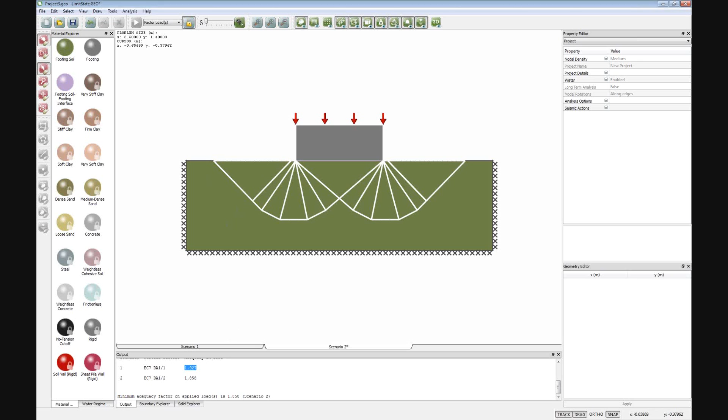Okay, that I think takes me close to being out of time, so we've run through the software. What I'm going to do is just wrap up by just recapping very quickly on what I've said there. Key thing about this software, we're doing ultimate limit state analysis, and it requires a slightly different sort of way of thinking about the problem that you may not be used to with conventional analysis, but once you've got the hang of it, it's very quick and easy to do. But as you've seen as I've gone through these issues, what we can say is anything we design we hope is going to be inherently stable, nowhere near its ultimate limit state.

If we're doing an ultimate limit state analysis, we have to drive the system to collapse by some means. We can do this implicitly or explicitly. In many conventional analyses and textbooks that you come across, it's been done implicitly, whereas when using numerical analysis, you have to do this explicitly. And we've seen that with the software. Two basic ways of doing that.

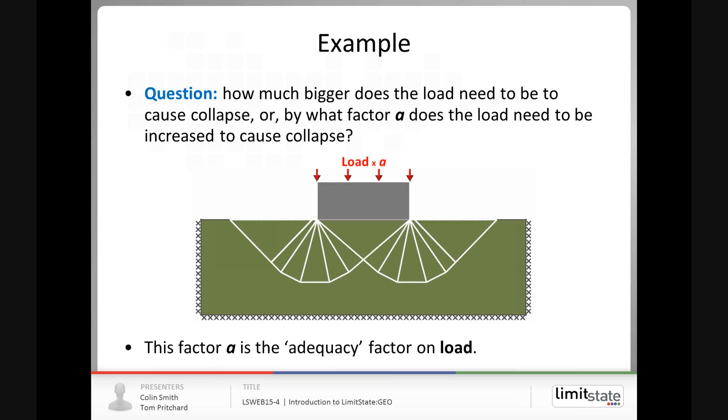First way is how much bigger does a load in the system have to be to cause collapse? Or in this particular case, by what factor A does the load need to be increased to cause collapse? That gives us an adequacy factor on load, which may be the same as a factor of safety on load in the conventional sense. Or alternatively, we can ask the question, how much do we have to reduce the strength of the soil by in order to cause collapse? And again, that's an adequacy factor on strength, and that again may be a factor of safety on strength for the problem.

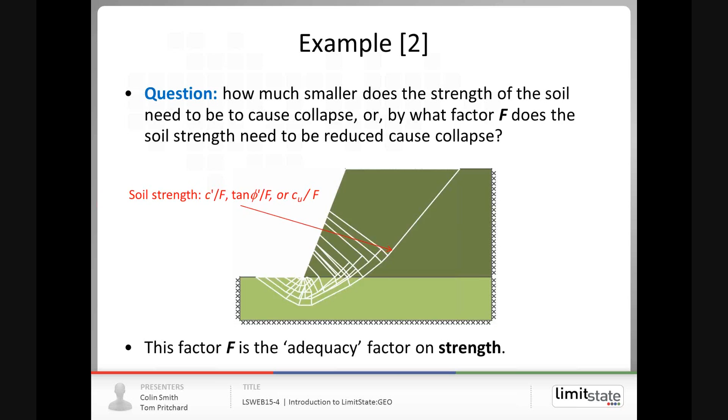And if the adequacy factor is bigger than 1, the system's stable. If it's less than 1, it's unstable. If you've applied partial factors, for example, in the Eurocode or any other code in advance, then if it's bigger than 1, you've complied. If it's less than 1, you haven't complied with those factors.

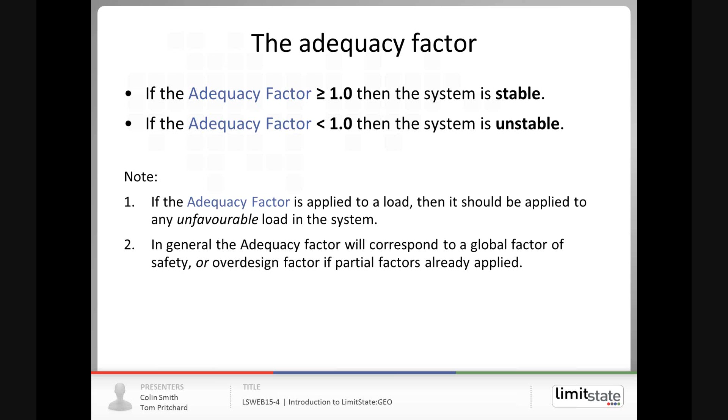So, I hope that's given you a useful introduction to the software, give you a feel for what it can do, how it can be used. I haven't had time to cover every item, but hopefully you've seen it's a very interactive tool. It solves quickly, allows you to change the problem interactively, answer what-if type questions, get a good feel for the problem. We can deal with any ultimate limit state problem type. There's no need to put in idealizations or correction factors for non-standard geometries. You can solve slopes, foundations, retaining walls, whatever you can draw, essentially, you can formulate as an ultimate limit state problem.

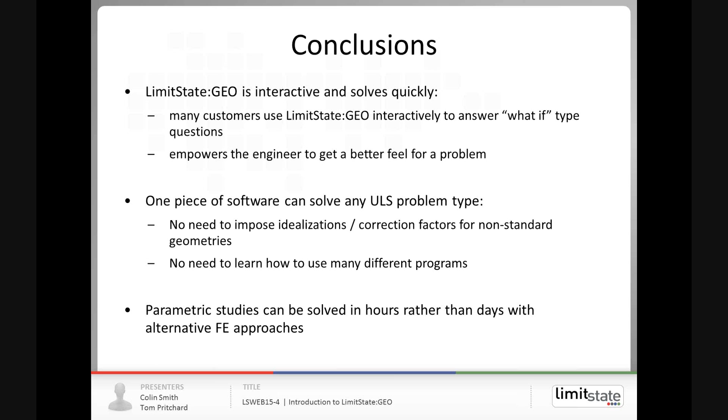And a lot of our users use it to do parametric studies, so that if you want to run through a whole set of different variants on properties, you can run that very quickly and get a good feel for how the parameters change the nature of the interaction. So that kind of wraps up where we are.

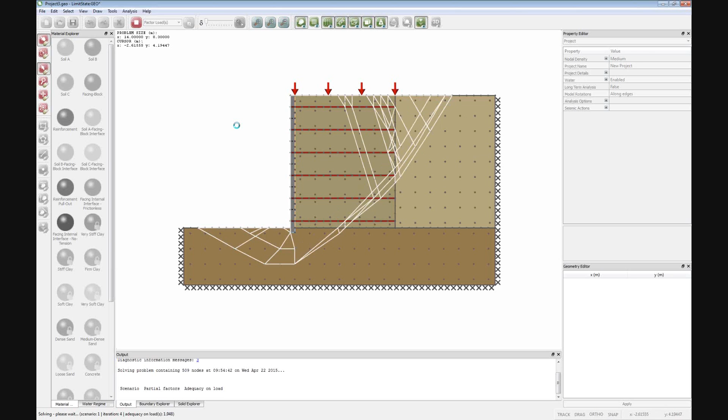So in this case, these are reinforcing strips anchoring concrete panels. So I click solve here. The software works out the reinforcing effect of those strips, its ability to transmit tensile forces through the soil from one area to another. And in this case, the software will actually plot by default the axial force along the reinforcing strip, so you can see how that's built up over its length.

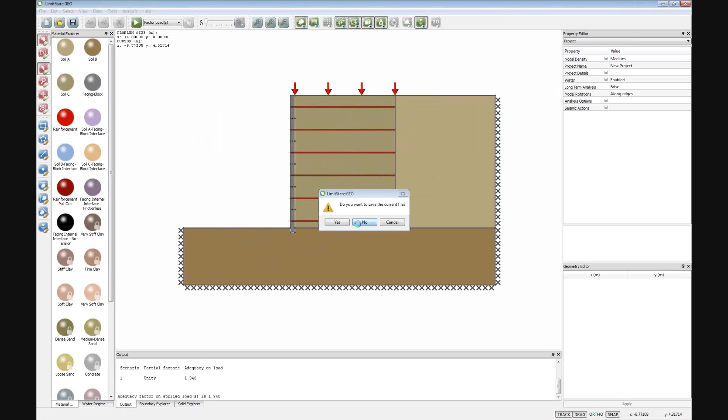Another question, can I incorporate seismic loading? Yeah, we can do that. So again, I'll perhaps go to a slope problem. We can apply seismic actions using a pseudostatic approach. So here we've got a button which allows us to apply horizontal or vertical accelerations, and we can apply them in two ways. We can either apply them as a fixed acceleration, or we can actually ask the software what level of acceleration we require to cause collapse.

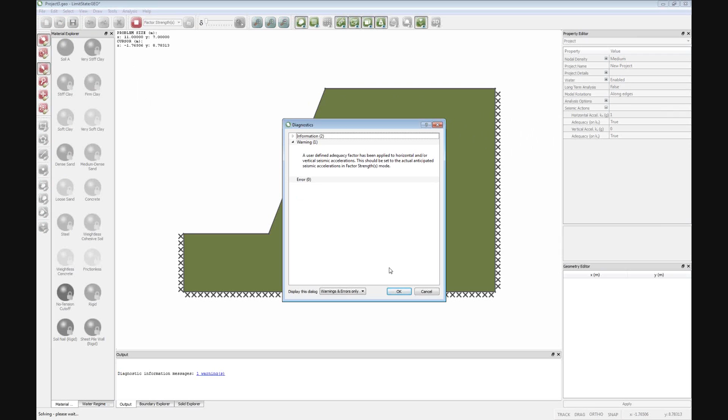So for example here, if I set this to 1, but I've got adequacy true, and if I remove adequacy from the weight of the soil, what the software will do is tell me what I have to multiply this unit horizontal acceleration by to cause collapse due to lateral acceleration. So if I click, okay, it's giving me a little warning, I'm in factor strength mode. For this particular case, I want to be in factor load mode. I'm going to stop that solution, flip to factor load.

So what this will do is if I click solve, it'll tell me effectively what the horizontal acceleration has to be to cause collapse. And here it actually turns out to be 1, so this problem requires 1g horizontal acceleration to cause collapse, which is pretty high, but that's fully driven by lateral body forces rather than vertical ones.